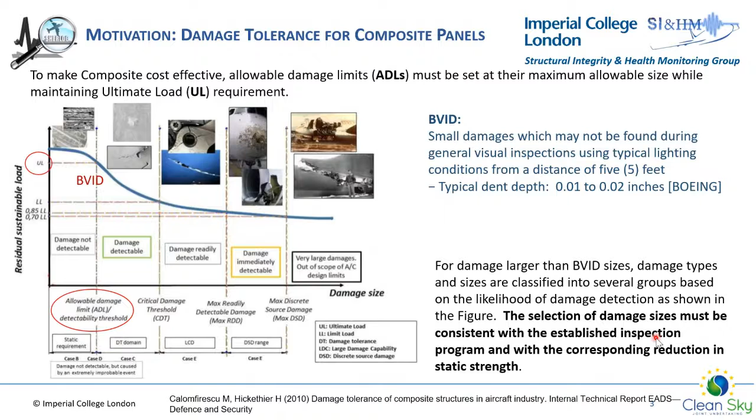So in this case, what we want to look at is this barely visible impact damage, and how can SHM influence this damage tolerance of composite structure? Let's have a look at that.

When we are designing different component parts for an aircraft, we know there are probable impacts that can happen on different sections of the aircraft. If you look at this graph from Airbus, you have the probability of different impact events at different sections of the aircraft.

Historically, this data has been collected based on metallic structure, because when there is impact on metal, you clearly see dents. For example, around passenger doors or cargo doors, because of the usage of the door, you have quite a lot of probability of impact happening there.

When you measure the size and depth of this impact dent, you can estimate what the energy of the impact event was. The design of composite is currently done based on the probable impact events on that section and the level of energy. You can see in this figure that based on different locations on the aircraft, you have different impact events, each with different mass and velocity, resulting in different amounts of energy.

Based on the energy levels and the minimum damage size that can be detected - which is established based on your inspection procedure, meaning the non-destructive inspection technique used during maintenance - we set this threshold of BVID. Then you can go on a graph like this and pick what thickness of composite is needed.

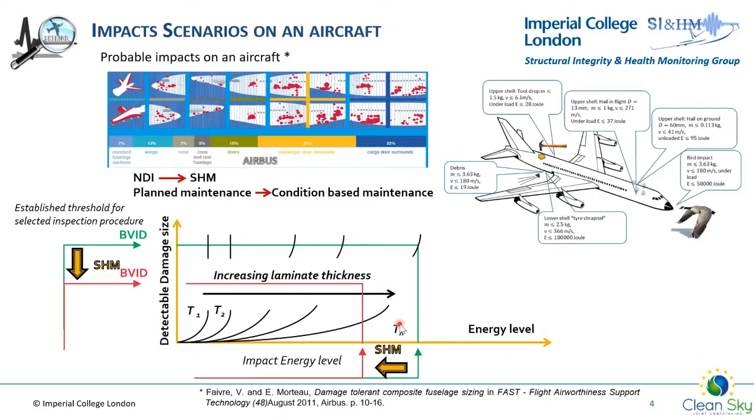But at the same time, if we also can have a better estimation of impact energy levels for each of these sections, if we really know what are the limits of the impact energy, we can also influence the design and result in thinner sections of composite. And we know that thinner sections means the structure is lighter and more sustainable, reducing fuel consumption. So this is really how SHM can influence the damage tolerant design, hopefully in a positive way. That's the motivation behind SHM.

Now let's go into what is really structural health monitoring. It is an alternative way of non-destructive inspection. The idea is that you have integrated sensors within your structure. If you take an aircraft, you integrate sensors which are permanently installed on the structure, and these sensors continuously monitor the response of the structure. It's similar to the human body's nervous system, where you have nerves distributed all over your body, and you can detect if there is an event that is hurting you. In the same way, the sensors in the aircraft will monitor the response of the structure.

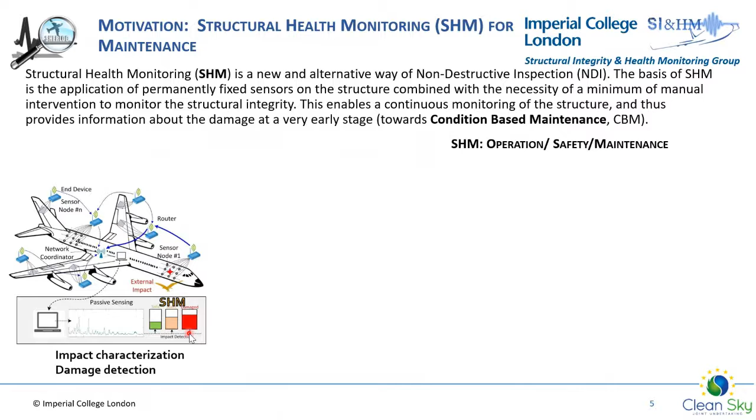This means that by enabling continuous monitoring of a structure, we move away from these inspection intervals, which are planned and are the current practice, where we only ground the plane and repair it when there is an event that has resulted in an impact that could be characterized into an alert and could have resulted in damage. So what we hope to achieve with SHM is, rather than having intervals when you inspect the structure, to have continuous monitoring of the structure.

In that case, if there is going to be an impact event, we can design an early warning system. This can be followed by an event where you characterize and detect damage, showing any degradation that has happened in the structure. It can then follow with a remaining useful life assessment, meaning that if we can detect the damage and characterize it, we can say if there's going to be a maintenance action required for the aircraft.

At the moment, inspection and maintenance expenses are about 25% of the aircraft's life cycle cost. This means that sometimes inspection is unnecessary, grounding the plane just because it's based on scheduled intervals. But at the same time, the reliability of damage detection can also be improved, because having sensors that are continuously monitoring the behavior of a structure, you don't rely on the capabilities of the technician missing a damage that is present.

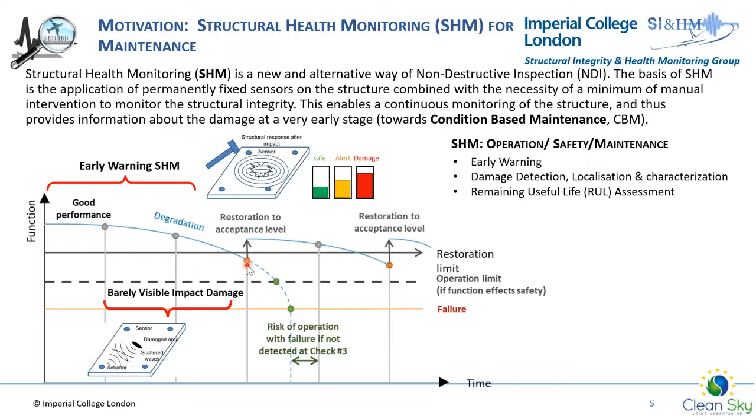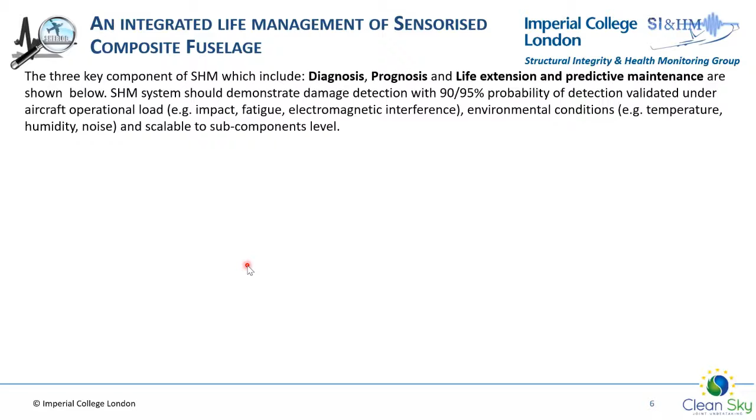So the reliability of damage detection can be increased while reducing the cost of inspection by going towards condition-based maintenance. Now, what are the components of SHM and how do we design such a system to be applicable to an aircraft structure? There are three main components: diagnosis, prognosis, and life extension. We'll see what each of them consists of.

The diagnosis part is really having the sensors distributed on the structure, gathering information from the sensors, and deciding what to do with this information. The most important part is that we need to comply with the probability of detection and reliability, which is 90-95%, acceptable for non-destructive inspection. And we need to demonstrate that this 90-95% is under environmental and operational conditions of an aircraft.

So if we take the diagnosis part, the SHM system will have components which are airborne, permanently integrated sensors within the structure. These sensors can be different types, for example fiber optics, piezoelectric, magnetostrictive, capacitance sensors, and also different installation procedures, which could be wired or wireless, embedded or surface mounted. These airborne components must show that they function reliably with 95% and 90% probability of detection under the environmental and operational conditions of an aircraft.

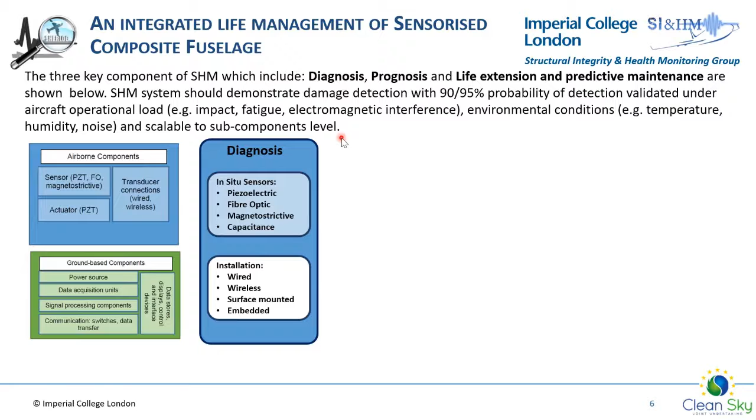Then prognosis is what we do with the data. The result of the sensor system will be an output where you have to decide whether there is damage, how to characterize the damage, where it is located, and what will be the recommendation to the operator - do you ground the plane or is it safe to continue? That feeds into predictive maintenance, so you need a good idea of the extent of damage and how this damage influences the residual life of a structure.

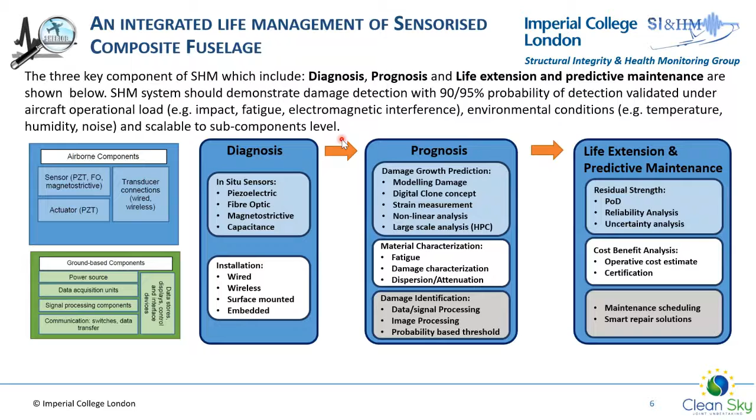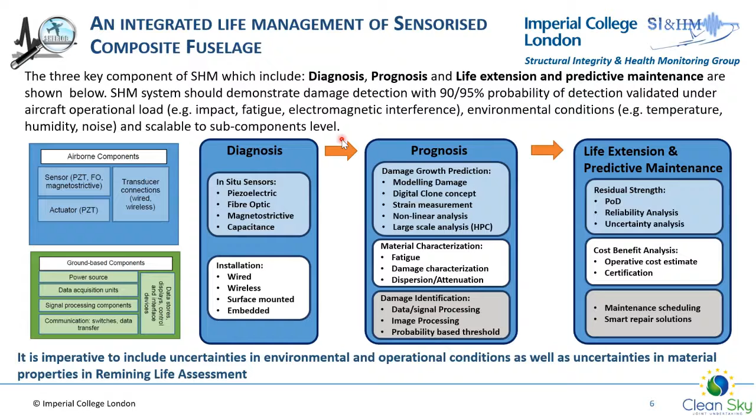Is it safe to carry operation, or do we need to ground the plane and repair it? So it is quite important to include uncertainties in the environmental and operational condition, as well as uncertainty in the material properties, because if we have to do the remaining life assessment, we need a numerical model or a digital twin concept where you establish whether that damage extent is going to result in failure or reduction in strength of a structure. So you need to run some simulations, and it's important that uncertainties are included in a reliability based analysis.

So this until now was really just an introduction of all different components of SHM and the bigger picture of how they can influence the maintenance of an aircraft, as well as damage tolerant design of composite parts. Now I want to focus on, okay, if we have this concept of SHM, how do we apply it to an existing structure and how do we design for it?

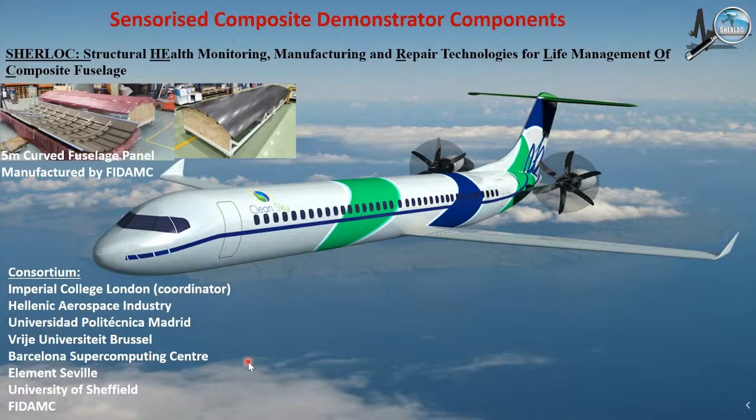This brings me to introducing the SHERLOC project, which is a Clean Sky 2 core partnership, a consortium made of 8 partners, and we at Imperial College are the coordinators of this project. It's related to structural health monitoring, manufacturing, and repair technologies for life management of composite fuselage. It's really a comprehensive assessment of a complete SHM system to date for a composite airframe. It means every piece of equipment and installation procedure for SHM components on board have been tested, covering their integrity, durability, and longevity, as well as methodologies for diagnostic and prognostic assessment. So I will introduce you to the components that have been tested in terms of SHM in this project.

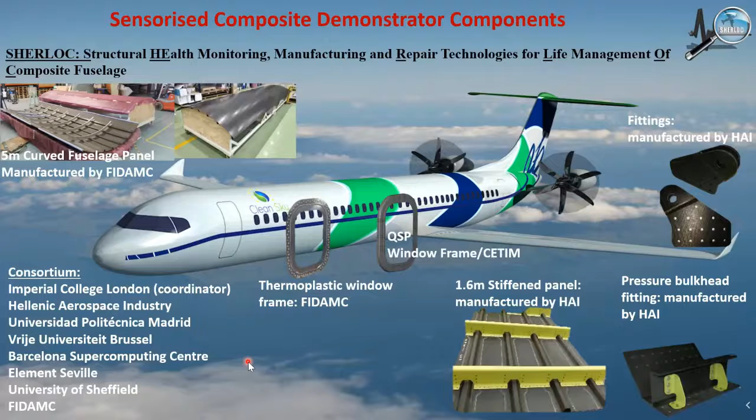There are 5 main components. The larger scale components where SHM has been designed for them: a 5-meter curved fuselage panel, a flat stiffened panel, fittings manufactured by composite, a pressure bulkhead fitting, and a thermoplastic window frame.

Each of these components have been manufactured with a different manufacturing technology. For example, the thermoplastic window frame used the stamping process as well as the QSP, a quilted stratum process newly developed by CETIM. The idea here is to show that these different components, manufactured by different manufacturing technologies, require different considerations when designing the sensor as well as the detection algorithms for detecting damage in service. For example, the floor beam manufactured by RTM process has different challenges because of its complexity in geometry and manufacturing process, compared to the fuselage panel manufactured with automated tape layup and co-cured with the stiffeners in an autoclave.

So the idea here was that, having all these 5 components in mind, and considering repair for all of these manufactured parts, how do you design an SHM system which can also move towards industrialization of these manufacturing processes as well? So we've looked extensively at different types of sensors as well as the sensing technology.

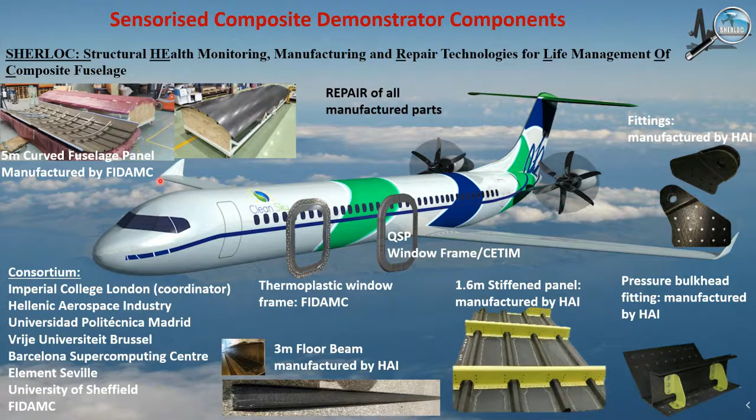Important thing to note is that we've done this technology roadmap for each of the 5 main structural items that you saw in the previous slide. Each structural item for us is a part plus sensor. So if we're looking at a window frame, that's a structural item, which is the composite window frame plus the sensors.

And the technology roadmap for that also has to be developed for all these aspects separately from the curved fuselage panel, because the material and manufacturing processes are different. So what we've proposed is to follow a similar philosophy to industrial verification of composite structure through a building block approach, conducting SHM analysis and associated tests at different levels of structural complexity.

So we start with a small coupon specimen, and we progress through the structural elements and so on. If we start with coupon elements, at the bottom of the pyramid we have the mechanical test, where we've done quite a lot of tests for finding the material properties at the coupon level, and it also follows with design and simulation.

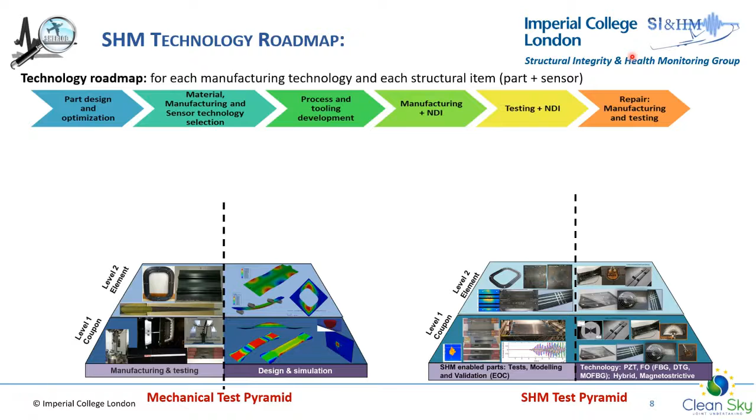Continuing to a subcomponent level, the down selection has then been made for sensor technologies and methodologies. The subcomponent level consists of a stiffened panel, which in this case we had as a flat stiffened panel as well as a curved stiffened panel. It's important to mention that the number of tests reduces as we go up the building block, similar to the mechanical test building block approach, and the down selection of technologies has been done based on survivability and reliability under operational conditions.

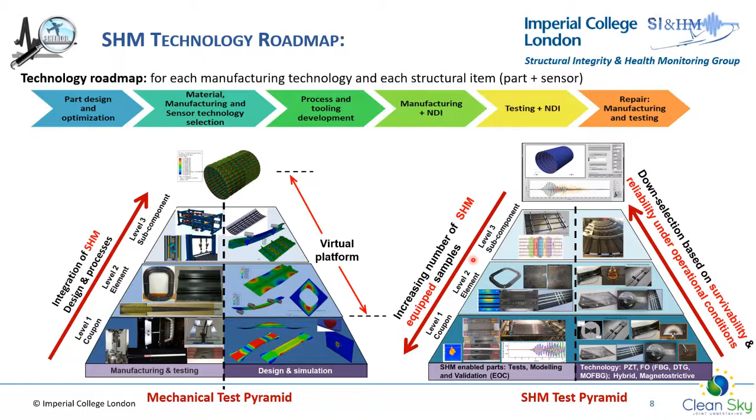And the last level, in SHERLOC, which is going to be tested, is the smart fuselage barrel—this is going to be done just through a virtual platform.

Now very quickly, going through the technology selection—I'm only going to mention what has been considered in this case, because there isn't time to show all the results here. But we also have publications available, and if you're more interested in knowing more about this, I'd advise you to go look at those papers.

But the technology selection covers the type of sensor, the type of acquisition unit, the type of installation procedure, as well as miniaturization.

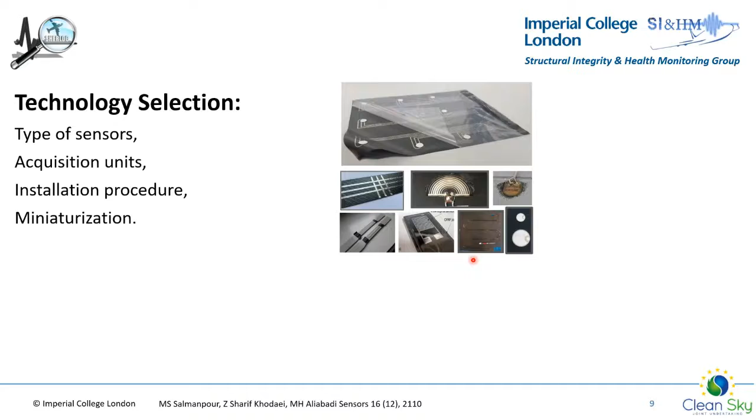Looking at all these different types of sensors, as I mentioned, the sensors used for SHM are numerous. You have fiber optics, you have piezoelectric transducers, and within piezoelectric transducers you have different types—piezoceramic, and piezo composites such as PVDF.

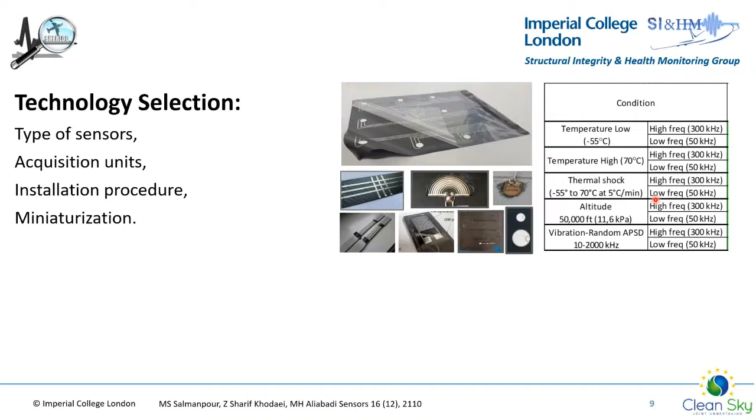All of this down selection has been done following the operational and environmental conditions of an aircraft, showing that the sensors can operate reliably once they've been put through cycles of combined loading in terms of temperature, vibration, and load, cycling them repeatedly. Every time you record the response of a sensor, it should give you the same baseline, because otherwise you'll end up with misdetection, or your sensors will fail. So this really takes them through the operational and environmental conditions of a flight.

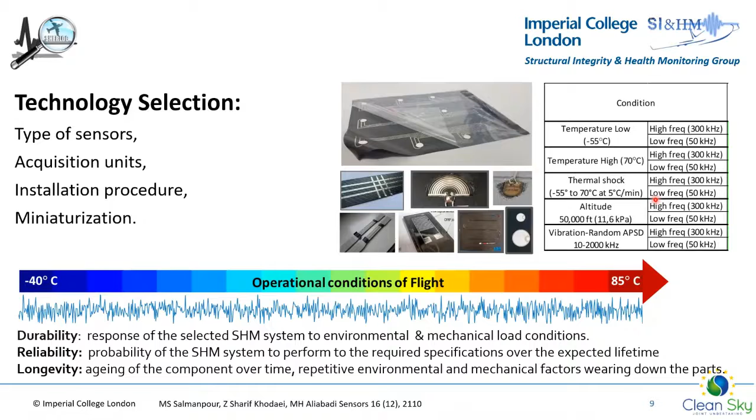And the selection is based on three different assessments: durability, reliability, and longevity. Following this down selection, for guided wave-based damage detection, which is what I'm going to focus on today, we've selected the piezoelectric transducers.

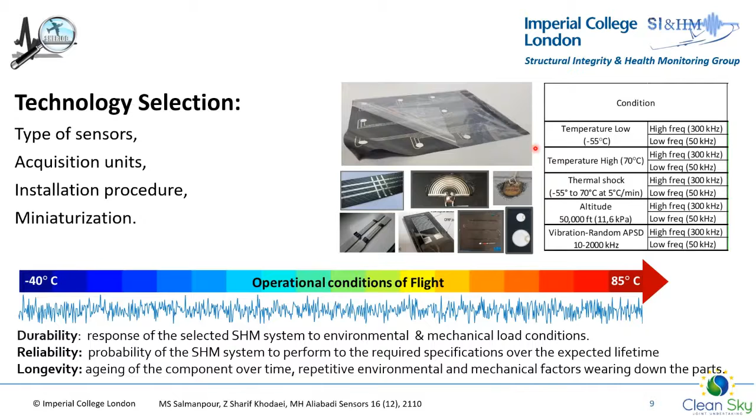This is in the form of a smart layer, which we developed at Imperial ourselves, where you have the protective layer, the transducers, and the wires that are printed with a thermoplastic bonding layer, which is repairable—we can actually peel it off and attach a new layer if one of the sensors has a fault. So there is also redundancy in the system.

So that's very briefly about the technology that has been selected.

Now, how about the methodology development? As you remember, I categorized the SHM developments into early warning and then into damage detection and characterization.

Early warning for us can be in terms of passive sensing. It means that the sensors continuously monitor the response of a structure, and they can detect if an external event such as an impact has happened. By processing the data recorded from these sensors due to an impact event, we can also say something about the energy of the impact.

So that can act as an early warning, and we only go to the next step, damage detection and characterization, if there has been a warning in the structure. Now, in terms of the requirements of such a system, because aircraft are weight sensitive, we need to make sure they are lightweight, low power, and function reliably under the environmental and operational conditions of an aircraft. These are really some of the functional requirements of the developed system in terms of the hardware that remains on board.

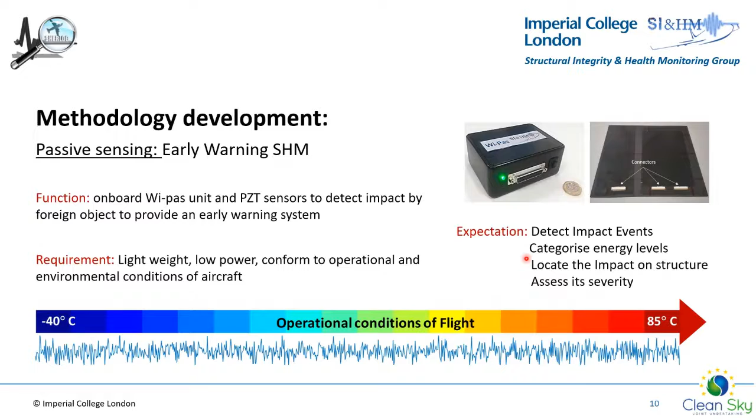The expectation of this passive sensing is really to be able to detect the impact event, categorize the energy, locate it, and also assess its severity. So how can we achieve that? There are obviously different ways.

Very briefly, I'll mention the principle behind impact detection and characterization. As you see - sorry, I think the video isn't working at the moment - but you can see when there's an impact event, there are guided waves or strain waves that are generated within your structure. If you have a sensor located at some distance from the impact, you will record these signals.

And the next step is really post-processing. How do you take the information, or extract the information, from these sensor signals?

A lot of work has focused on machine learning approaches, where you take information features extracted from different sensor signals, and you can then locate where the impact was based on the estimated time it takes for a wave traveling from the impact location to your sensor location. If you have a network of sensors, by fusing this data, you can gather the location of the impact.

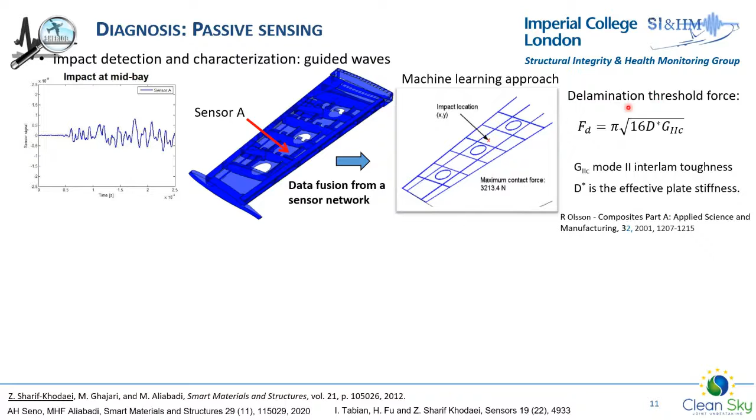But more importantly, you can also say something about the maximum contact force and relate this maximum contact force to a threshold, which is the delamination threshold, and then categorize your impact based on that.

Here you can see at the bottom the C-scan results of four different plates, manufactured exactly the same with the same layup, impacted with different levels of energy. Some of them are low, as you see here, the impact force which has not resulted in any damage, and some of them are high, where you can see that delamination has occurred between the plies.

When we compare the contact force to the maximum amplitude of the recorded signals, you can see there's a direct correlation between the amplitude of the signal and the threshold, shown here as the dotted line, which is the threshold for initiation of damage.

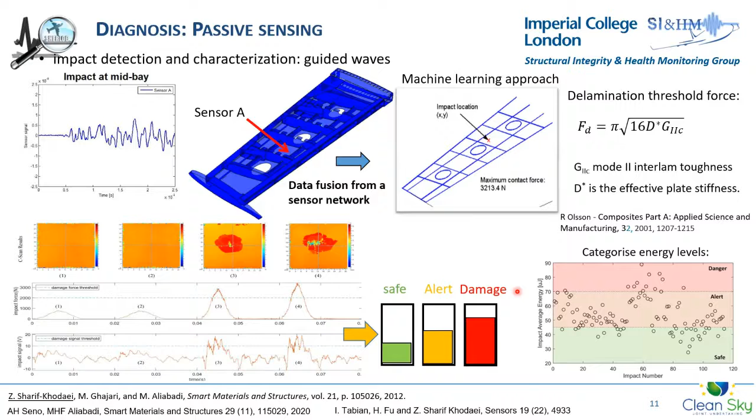So by looking at it at this level, we can categorize the impact into safe, alert - which is the region close to initiation of damage - and a red signal, meaning something definitely has happened and you should ground the plane and go to the next level, which is active sensing for damage detection: localizing the damage and categorizing its size and severity if possible.

This brings us to active sensing, which contributes to maintenance action. So how do you take this damage detection, and depending on which level of methodology you are able to develop, you will have a different outcome from the active sensing.

Again, the active sensing functions in terms of sensor technologies, the sensors remain on board, so again they have to be weight sensitive and low power. They have to resist the operational and environmental conditions, not just the sensors themselves, but also the installation process as well.

There can be four different levels of expectation from your active sensing methodology. Level 1 is really just detecting that damage exists. Level 2 is detecting the location of damage.

Level 3, detecting also the size and severity of damage. And level 4 is really going towards prognosis to say, okay, what is the influence of this damage on the residual strength of a structure.

As you increase the different levels of the intended function of your active sensing, you increase also the complexity of your SHM system, and the number and location of sensors must also be optimized for different levels of intended function. So at the moment, we're going to focus on level 1 and 2, which is detection and localization.

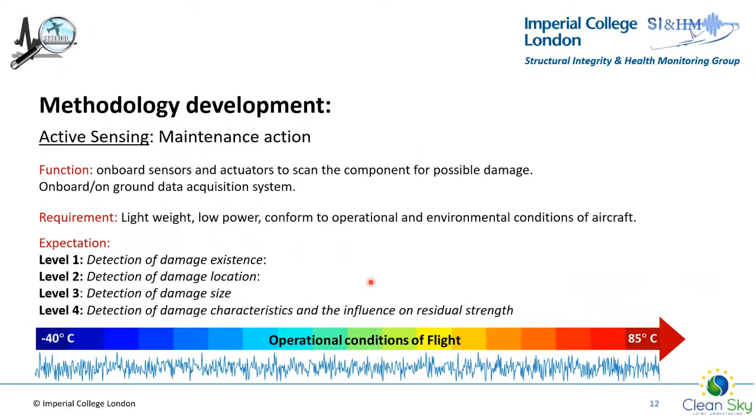So how can we achieve that for a sensorized fuselage panel by developing active sensing methodologies? As I mentioned, the focus here is going to be on guided wave detection methodology. So a brief introduction of what are guided waves.

So the idea is that when these waves are traveling through the structure, if there is damage present, the characteristic of the propagation changes. The waves interact with damage, and they refract or reflect. By capturing these small changes in the path of the wave when damage is present, we hope to detect damage, locate it, and also characterize it.

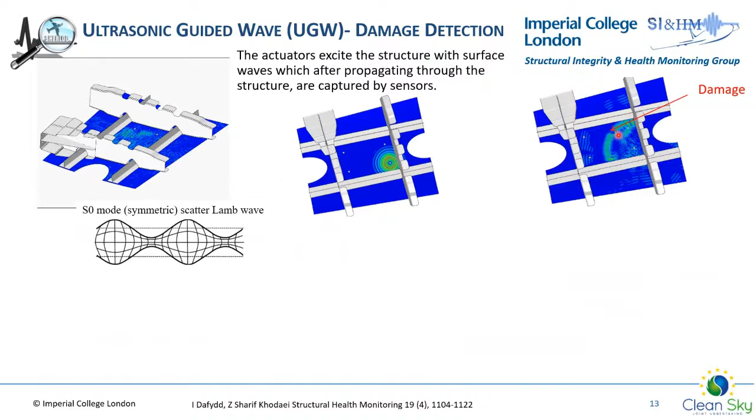But there are different aspects of the guided wave we need to bear in mind when designing an SHM methodology. First of all, they are multimodal, so there are different modes, symmetric and anti-symmetric. These are with respect to the mid surface of the plate, and they have different properties, how they propagate through the structure, different velocities, and so on.

They interact with damage very differently when you compare the A0 and S0 mode. Depending on the thickness of the plate and the type of damage you want to detect, you can actively excite the structure with the given A0 or S0 mode. So these are really the characteristics of the wave that you need to have in mind and consider.

But most of the detection algorithms are baseline methods. This means that when you sensorize your structure, you record the baseline at a healthy state, so you know the response of a structure when there is no damage. After a while, if you want to detect whether there is damage, or check the integrity of a structure, you retake these measurements and compare the current state with the baseline state.

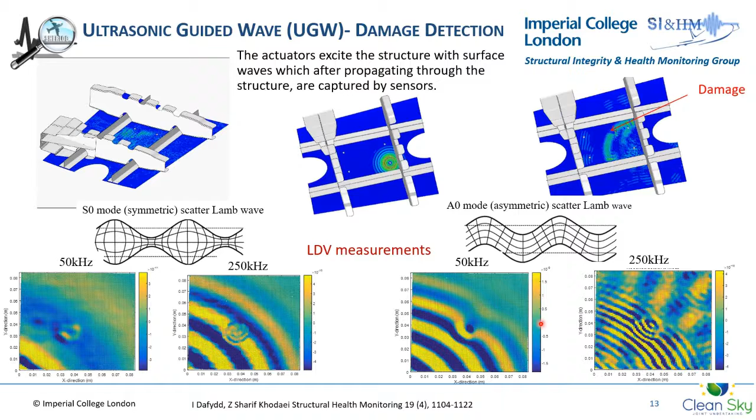This means that if your guided waves propagating in the plate are sensitive to operational conditions such as changes in temperature, load, or background noise, these changes can be mistaken for damage if you don't correct for it. That's why it's very important to study the effect of guided waves, especially under temperature differences, because the effect of temperature can easily be mistaken for the effect of damage.

This takes us to the process we've developed within Sherlock, which is a building block approach for SHM verification, where we've tested SHM development at coupon level under environmental and operational conditions, developing compensation factors for temperature at material level at coupon. These can be updated at the monostringer with different complexities, such as a stiffener bonded to the skin, and then verified at the last level, our subcomponent level, for detecting multiple damages.

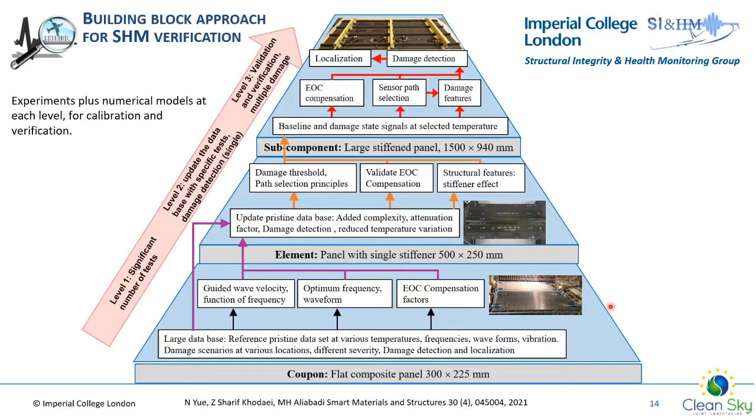So this is very briefly showing these different levels. In a second, I'll go quickly through how the development has been done in terms of detecting damage at the subcomponent level. This is just showing an environmental chamber for the flat panel where we've taken measurements at different temperature variations for verification and validation.

And this is a coupon that you can see again in an environmental chamber, but the range of temperature that we've taken at a coupon level has been much more extensive.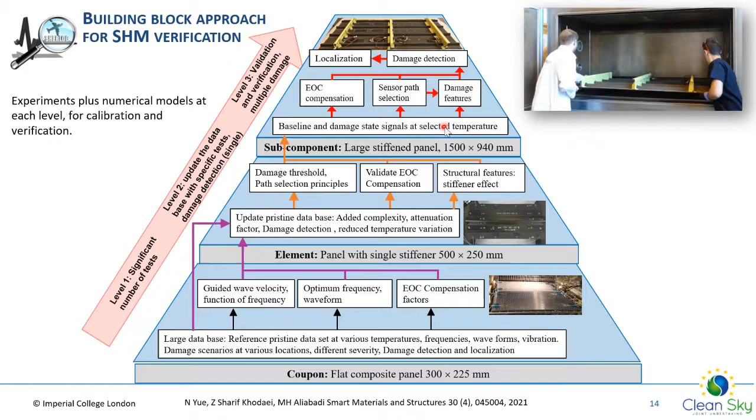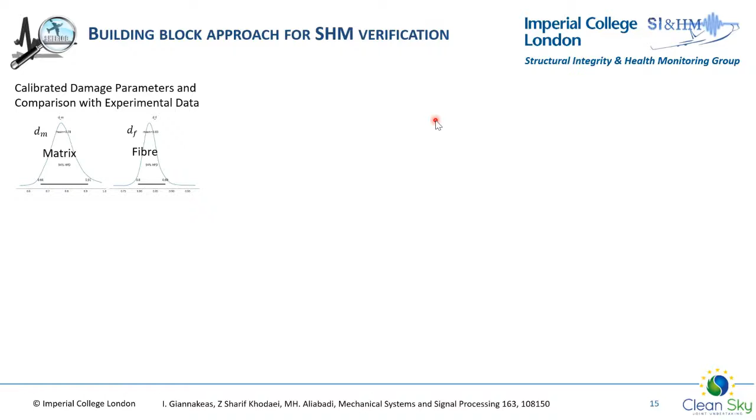So going from -40 to 80 degrees, as we go up the scale we have reduced the number of tests and the range of temperature changes, and we've used it as updating the factors and or just verification and validation. So this is, again very quickly, the numerical analysis that has to also go alongside this building block approach for SHM verification, because at the end we're going to have a virtual platform.

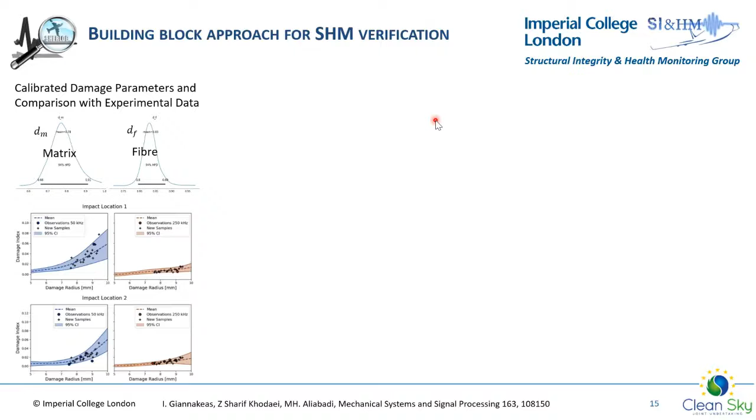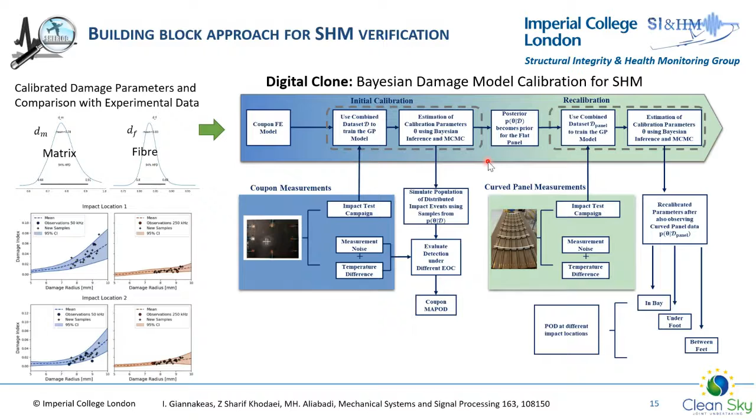In this case, it's really a calibration of damage parameter based on experimental data, using statistical analysis for updating. There's no time to go through all aspects of it, but just to mention that this mechanical and experimental testing has to go combined or side by side with this numerical development, which we've developed a digital clone for, which is to have all these recalibrating parameters. Every time a new experiment becomes available, we update this to increase the reliability of the detection. So really, just very quickly about the effect of temperature and vibration on the signals.

You can see an example of how the signal is affected by temperature changes and also vibration, so it's very important to be able to compensate for it. What we have done is, again following the building block approach, we developed compensation algorithms for temperature at coupon level. And as we go up the scale, we have updated it and verified and validated it for different scales of the test.

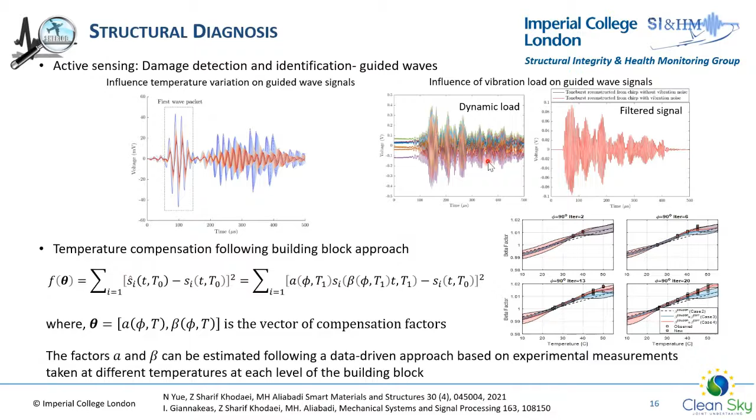So really, the damage detection is based on how you process the data, the pristine and the damaged data. By introducing a damage index, we developed a threshold for a pristine state and a damaged state. You put your detectability threshold somewhere that is way above the noise threshold in your data, and also, after compensation for temperature, you need to ensure that the damage is really detected reliably. So this is the first level where we've detected damage based on damage indices.

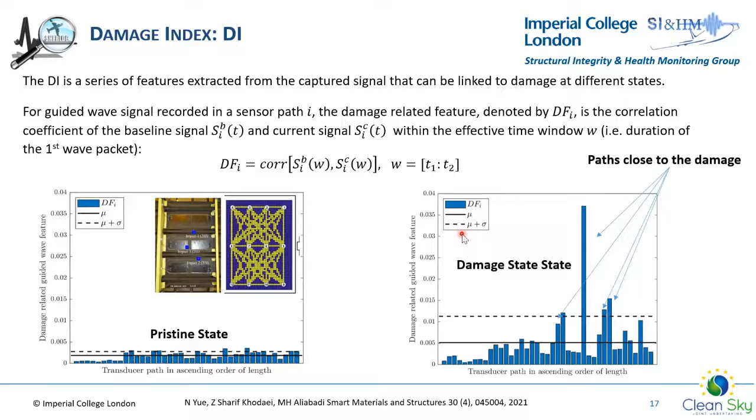Going up the scale, you can see here for the three different levels of coupon, element, and subcomponent, we've introduced the damage index, where it detects reliably damage being present given a threshold. So this threshold setting has to include a lot of uncertainty as well, so it's reliability based. Again, if you're interested in knowing more, I refer you to our publications.

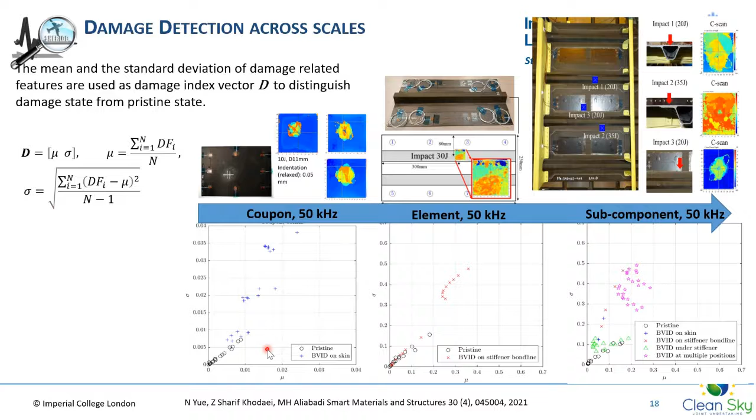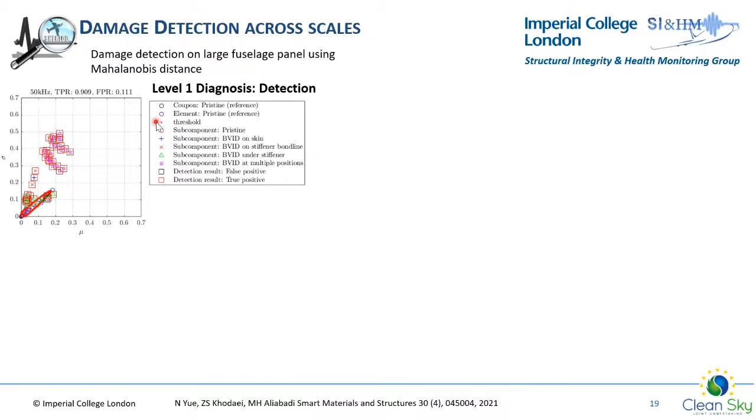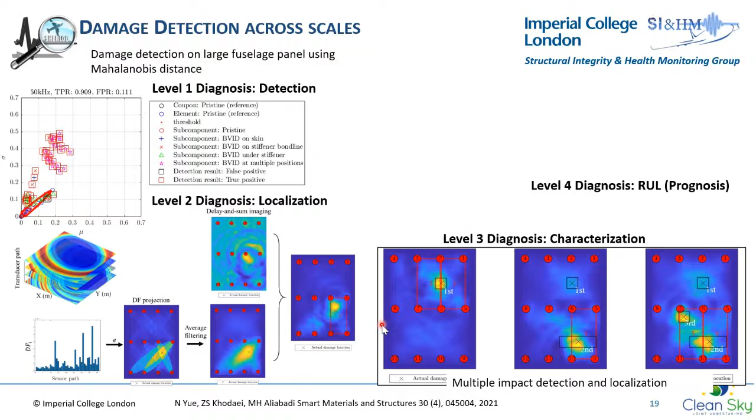And level two is then localization. There are very established localization algorithms such as rapid, delay and sum, some combined with weighting residual. We've calibrated some of these imaging algorithms to detect impact, but also to be able to detect multiple impacts. By grouping the sensors, you can see here that we've detected multiple impacts, and these are the results of damage localization at the subcomponent level, which is the flat stiffened panel.

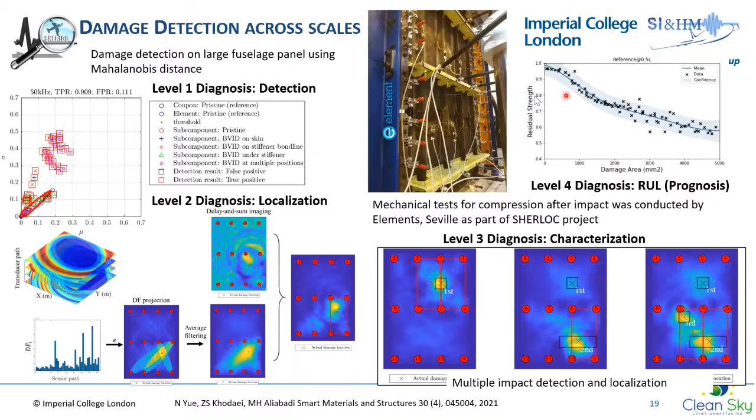Once you've detected your damage, then of course the next level is to do the residual remaining useful life analysis, which is the prognosis, and at the same time the residual strength, which you can see here. There's an actual test that has been done, but also we have to combine it with numerical simulation, where you include uncertainties in the material as well as load and so on. And you can then set your detectable damage threshold based on reduction in the ultimate load.

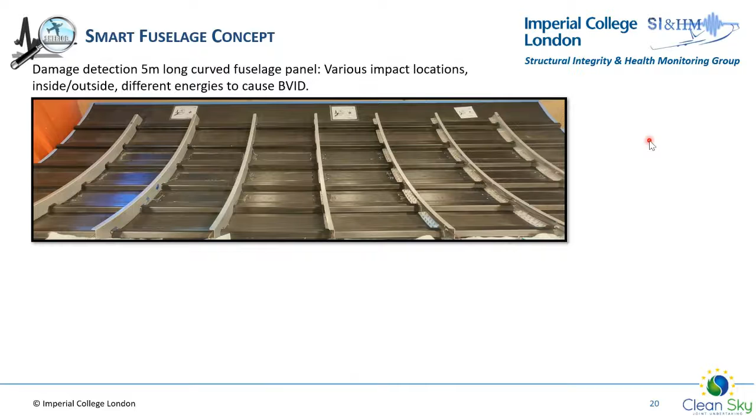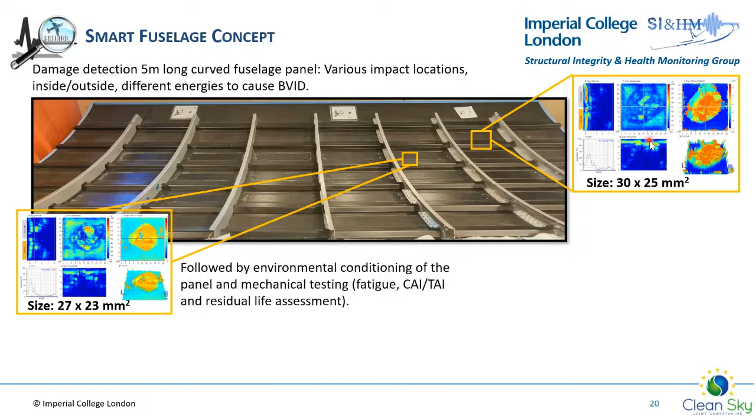Now we are at an exciting stage of the project where we've just impacted this 5-meter long fuselage panel. So here I'm just showing the C-scan result of the impact. And really, what we are waiting to do now is to put this panel under environmental conditioning. The next stage of it would really be to do a full-scale test in this very complex machine, where we do compression after impact, tension after impact, and so on, to get the residual life of a structure.

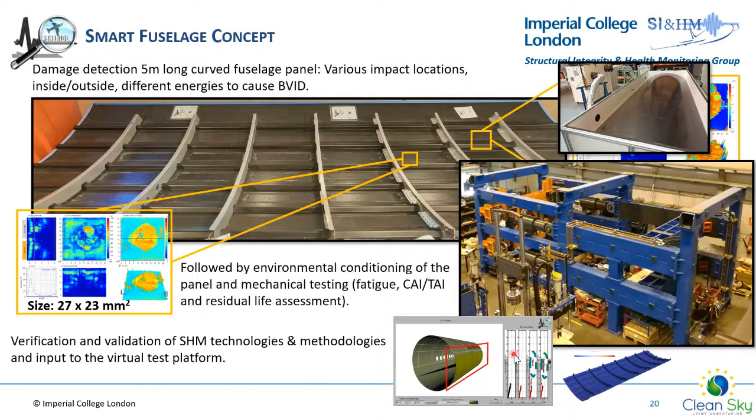And once we have that result, then of course we can feed that for verification and validation of methodologies and technologies as input into the virtual platform. So that's really the up-to-date progress of the SHERLOC project, which is developing SHM methodologies and technologies towards industrialization of SHM-enabled smart fuselage.

Here I just put some conclusions and the way forward, to emphasize that there are aspects that still need development, especially reliability, probability of detection, miniaturization of electronics on board, and more importantly, there has to be a cost-benefit analysis. So if you want to go to an airline and convince them to take SHM on board of an aircraft, you need to have a cost-benefit analysis for it.

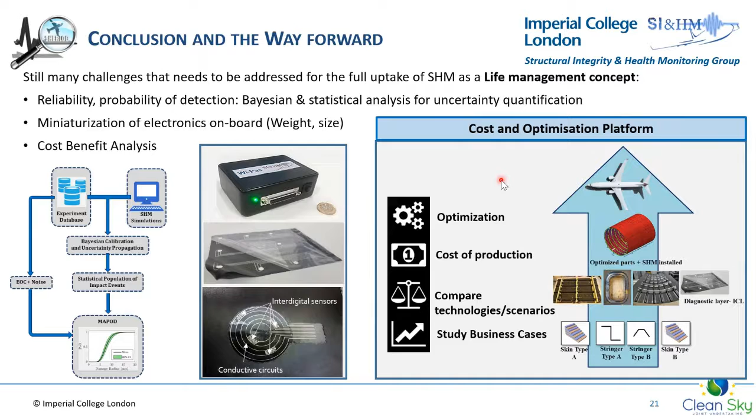So these are all things we are developing and progressing within SHERLOC at the same time. Sorry, I had to rush a bit through, but most importantly, at the end, I'd like to thank all our PhD students and research staff who have contributed to everything that you've heard today. Thank you very much, and I'm happy to answer any questions that you have.

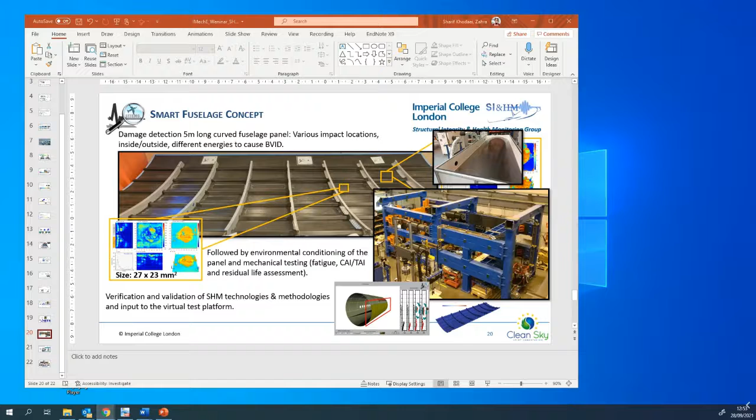Yes, there's a paper we are waiting to be published with our postdoc Ilias, and he's done a wonderful job looking at the cost-benefit of having SHM on board. He has compared the cost in terms of added weight, as well as of different sensor systems.

So this is a guided wave-based SHM system, but with printed wires. One of the reasons we've developed this diagnostic layer and printed the wires on top was because the actual wires were very heavy, and we realized from previous projects in SARISTU that this is not acceptable, because any weight savings you make get compensated by SHM, you're just going to add extra weight.

So the layers that we print the wires on are very light. They hardly have any weight, but at the same time, we've included the cost of that in terms of fuel, extra fuel that you need.

And we've figured out how many years of operation you actually need to balance the cost of SHM versus the maintenance cost. So it's not something where at the start you can say this SHM is going to be cost effective. You have extra cost at the beginning for the sensors, but in about 10 years time, you will see the benefit of having SHM on board. Hopefully the paper will be out soon, and I can refer you to that.